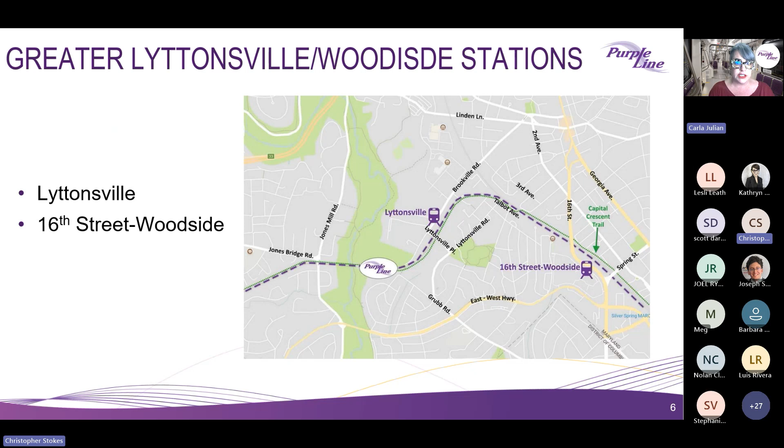And with that, I will introduce Ray Biggs, who will turn on our spring progress video. Thank you, Carla, and thank you everyone again. Welcome tonight. We are glad that you are joining us this evening for the CAP meeting.

We want to talk a bit about the momentum in 2024 on the Purple Line, which has now evolved into the transformation you just saw in the photos shown before the meeting started. Hopefully you saw the pictures going back and forth and can really see the Purple Line taking shape. Tonight you will see our 2025 Spring Progress video, including footage highlighting some of the transformational progress across the 16-mile Purple Line alignment. So without further ado, Chris, let's play the video.

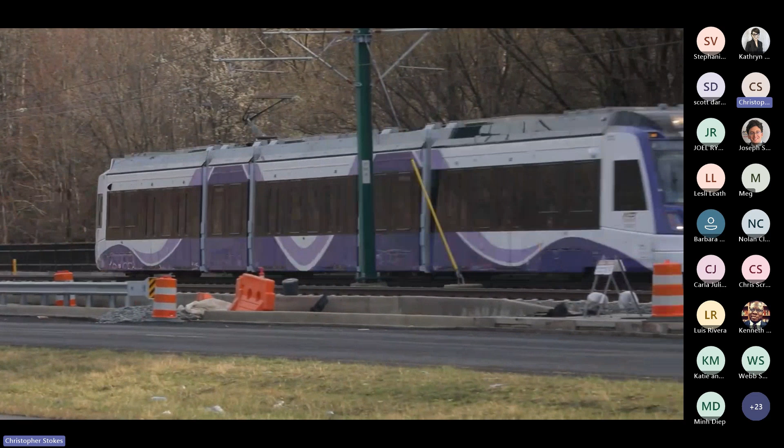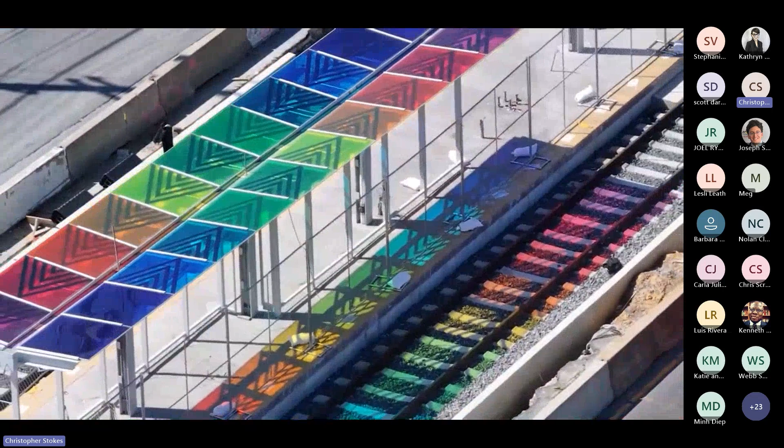Overall, the project is more than 76% complete. Now let's take a look at some of the transformations across the alignment over the past year.

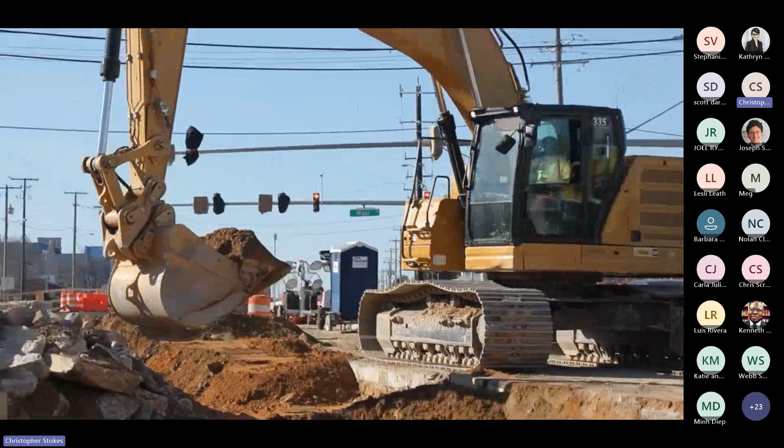In Bethesda, we have gone from a rocky shaft to a concrete cavern, which will one day soon allow commuters easy access to the Metro's Red Line.

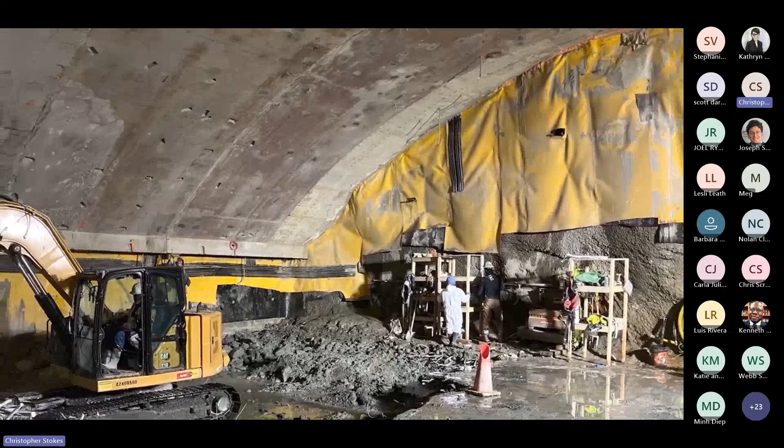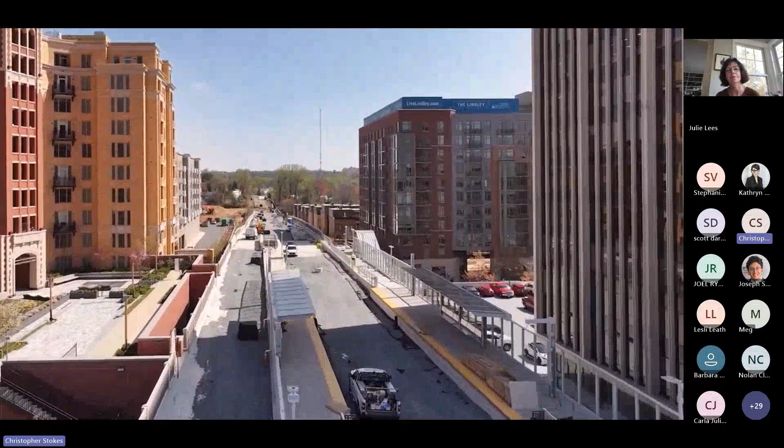In Chevy Chase, the Connecticut Avenue station is awash with color as the station continues to progress and have a transformative effect on the community around it.

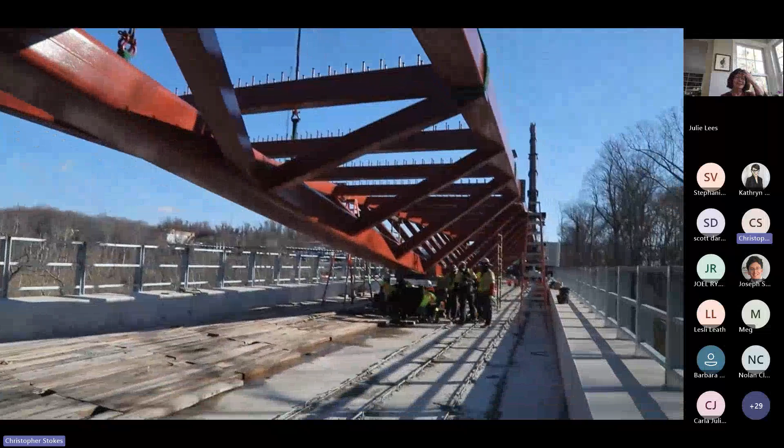Over Rock Creek Park, there is a new Capital Crescent Trail Bridge. This unique inverted truss bridge will be an iconic part of connecting the communities and the Rock Creek Trail system.

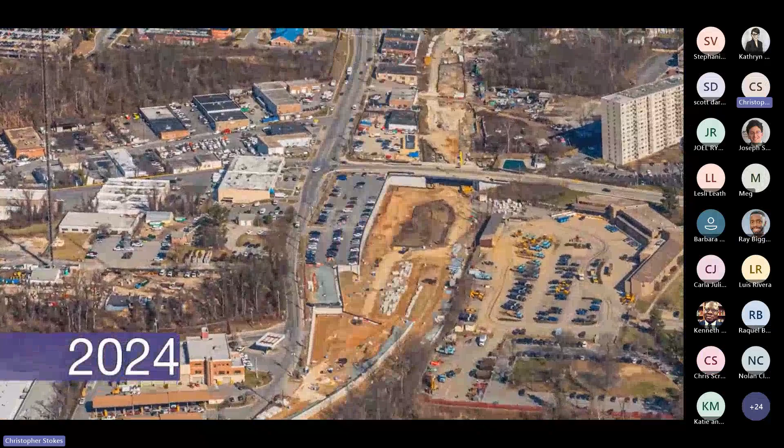The Lyttonsville Operations and Maintenance Facility and the Lyttonsville Station buildings can now be seen. The next transformation will be the installation of the many tracks in the yard.

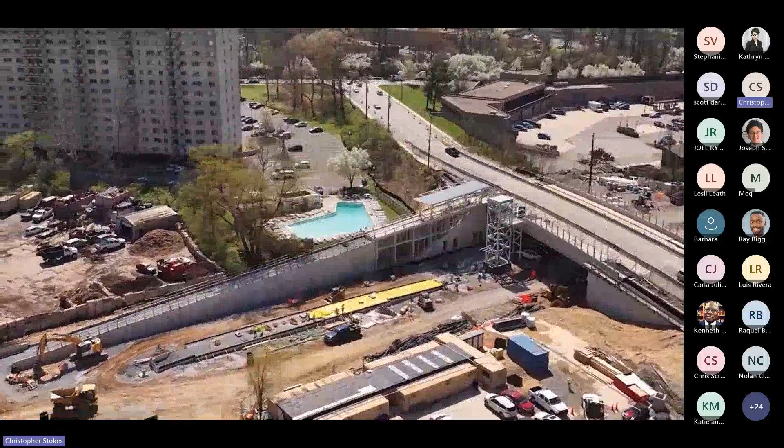Over in Silver Spring, the 16th Street station is now under construction. This makes all 21 stations now under construction.

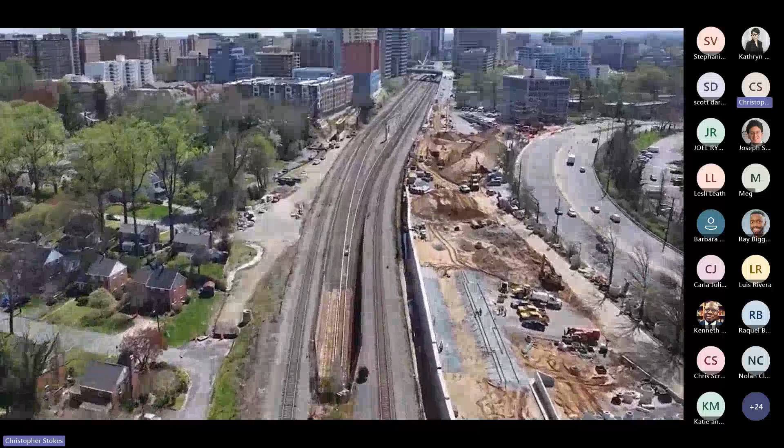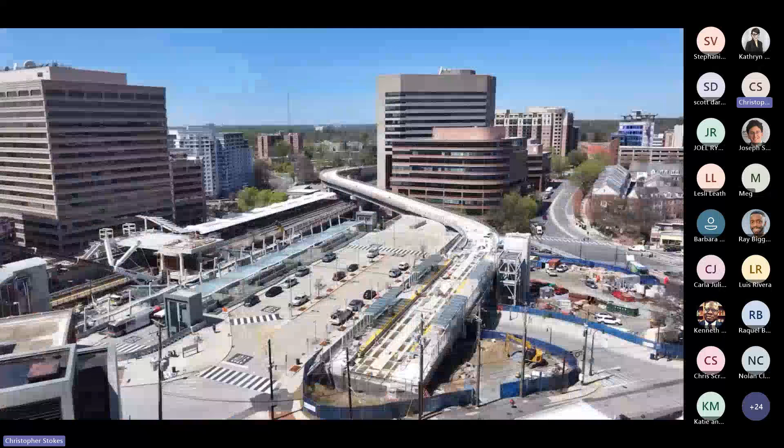The Silver Spring Transit Center is being transformed into an even more important connection point as crews construct stairs and elevator connections to the nearly complete Purple Line station. Crews have also completed the challenging structural work for the new mezzanine over the Metro and CSX tracks.

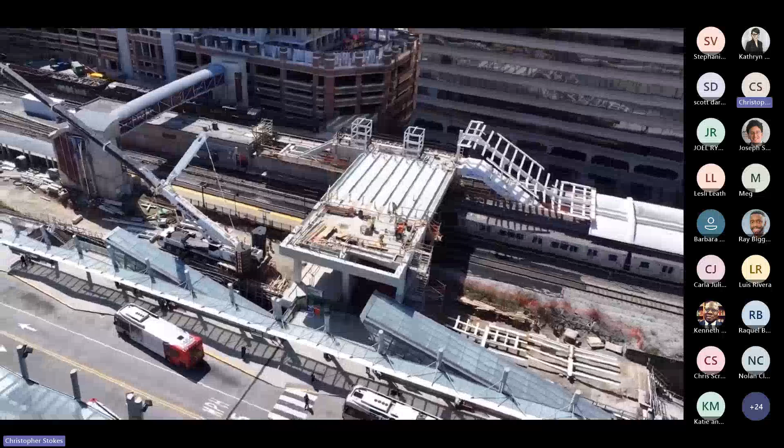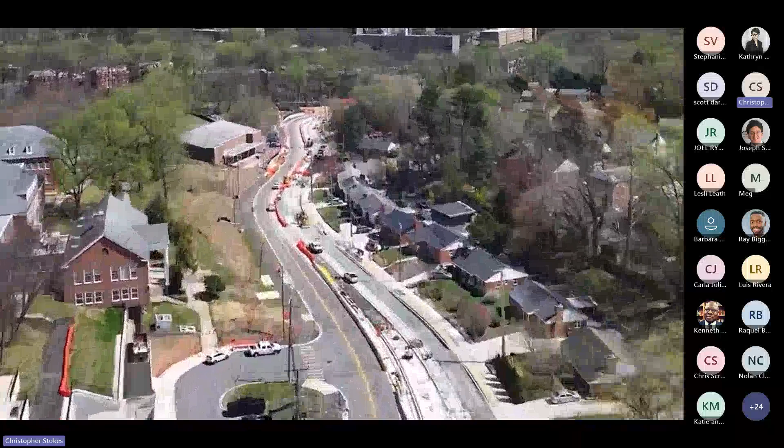Just outside of downtown Silver Spring, Wayne Avenue has more tracks, sidewalks, and curbs. Traffic has been moved onto the newly completed half of the Sligo Creek Bridge, and trail access has been improved.

Piney Branch Road has been totally transformed, with tracks embedded in the roadway and curbs and sidewalks along the entire length.

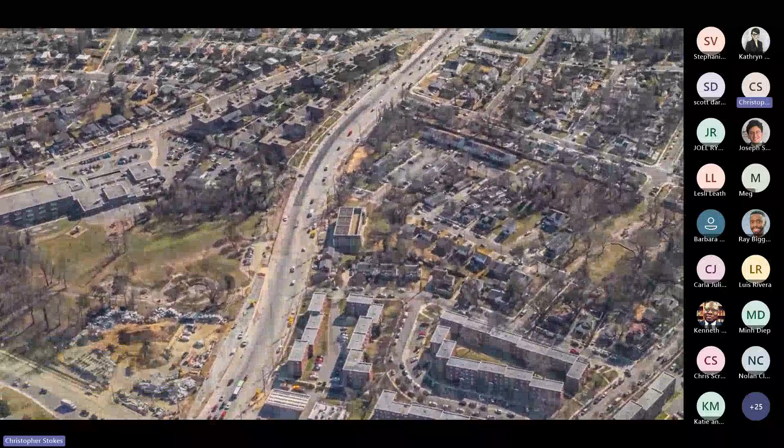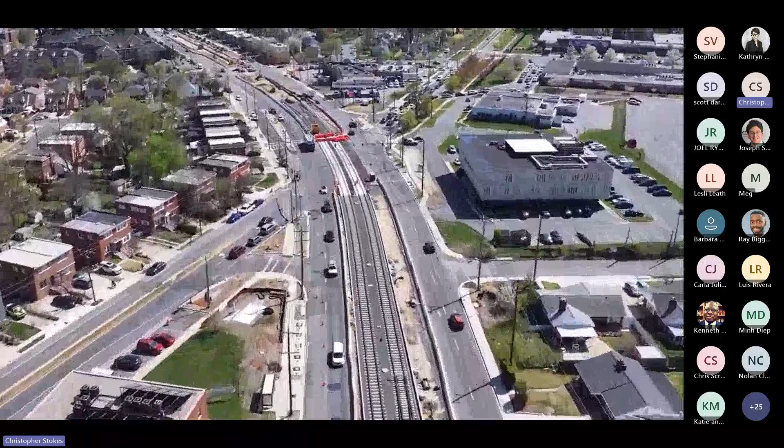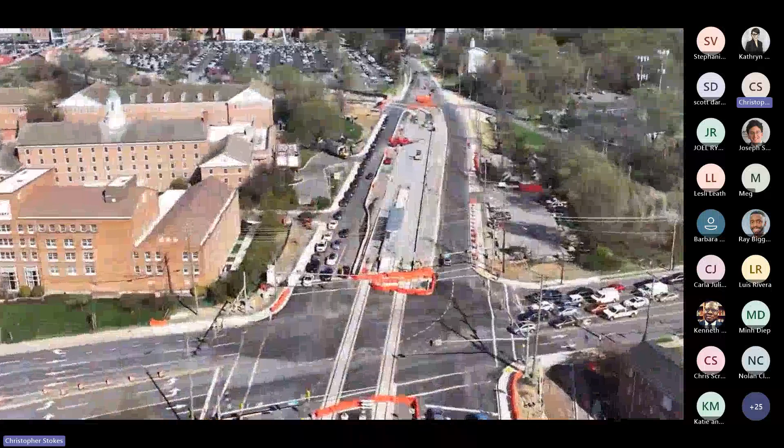University Boulevard has seen a tremendous transformation as crews complete over 95% of the curbs and sidewalks and have installed miles of tracks, including completing the most challenging crossings at Carroll Avenue, Riggs Road, and New Hampshire Avenue. At the UMD campus, tracks are installed across Adelphi Road, and most of the campus has catenary poles installed.

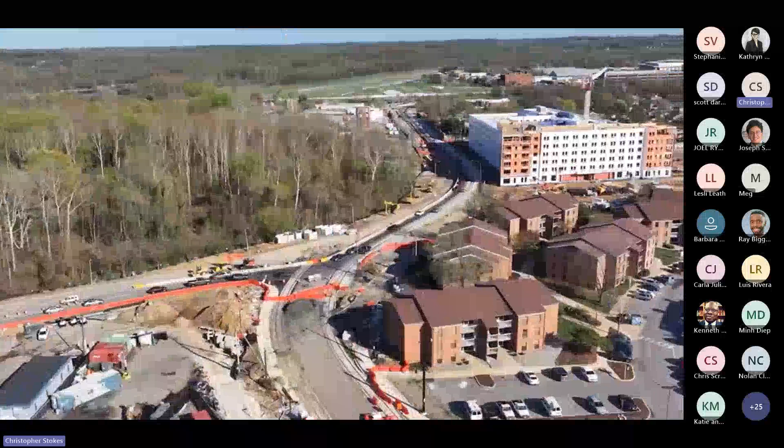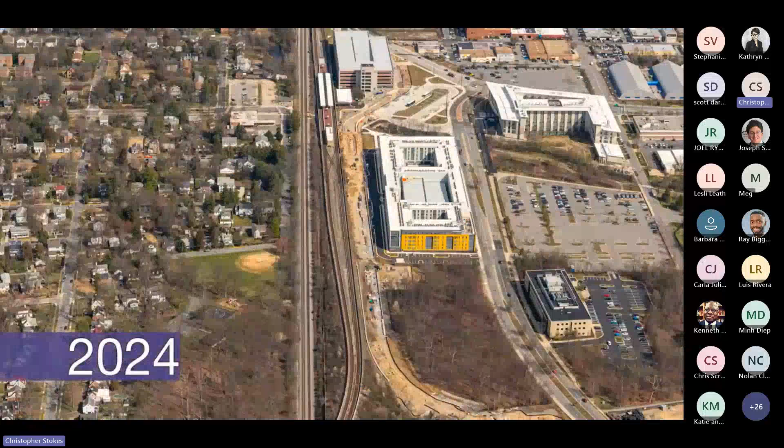The campus now prepares for system integration. Campus Drive, to the west of campus, now has the first pair of tracks installed, and drivers have been shifted to allow the final phases of restoration. Along River Road, stations, tracks, and even fencing have been installed.

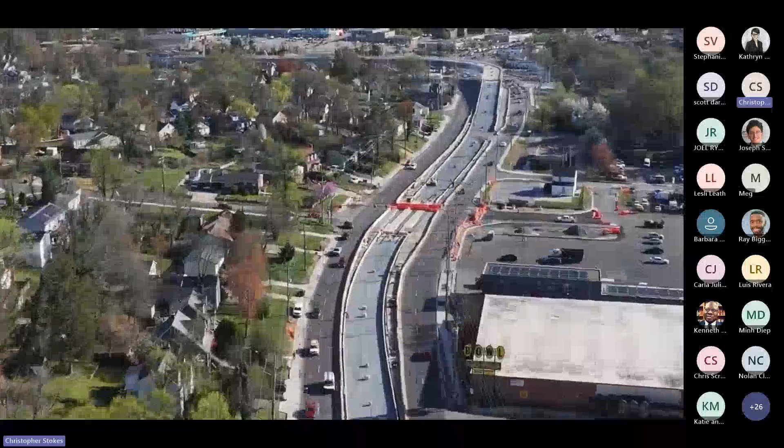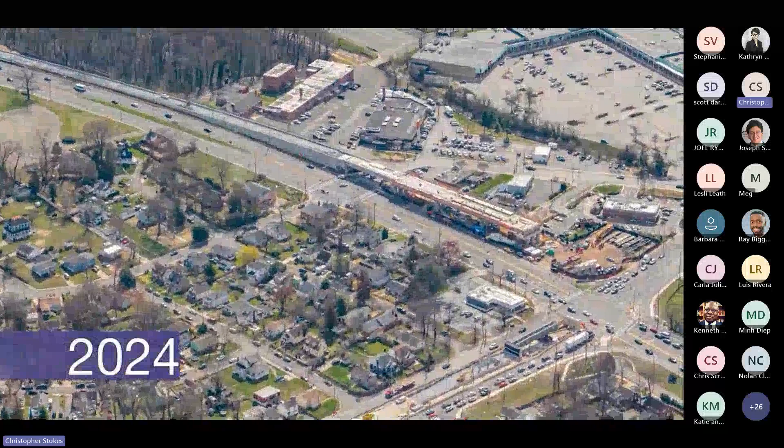Kenilworth Avenue has also seen a major transformation as curbs, sidewalks, and driveways have been completed, allowing the track work to commence in the middle of the roadway. The flyover at Kenilworth Avenue and East-West Highway and the elevated station continue to impress. The access stairs and elevators are underway, and the station's clear windscreens are ready for riders.

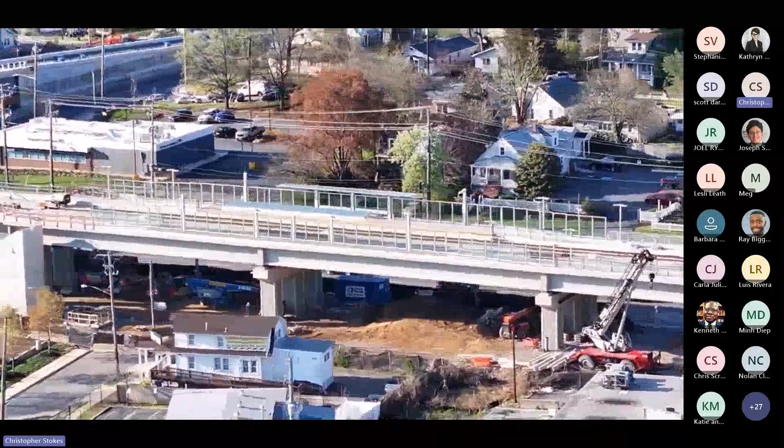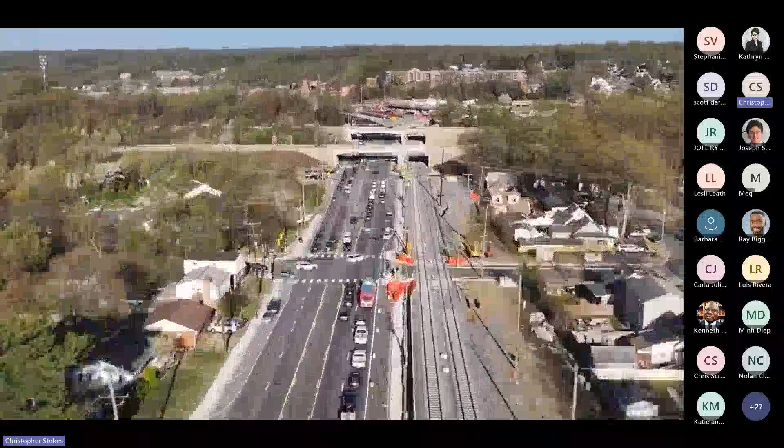Along Riverdale Road, new street connections, ballast, and tracks can be seen making tremendous progress. Specialty crews have completed the beautiful stonework on the Baltimore-Washington Parkway bridges, and the Beacon Heights station is largely complete.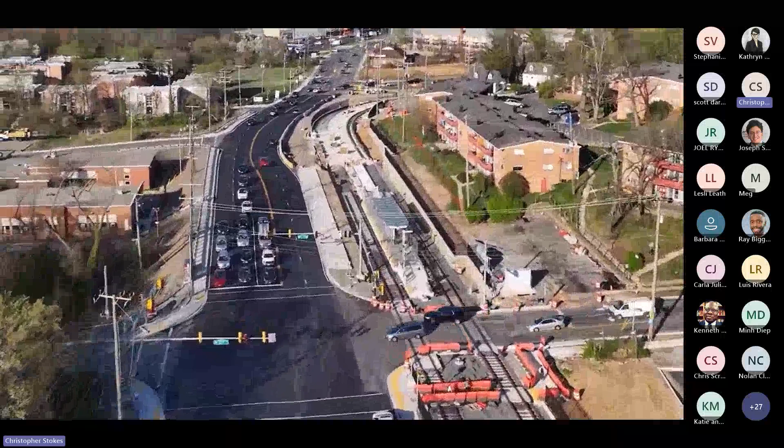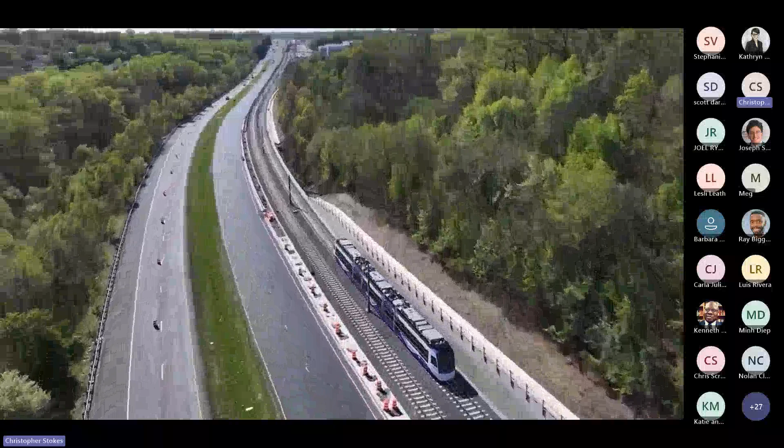In case you didn't hear, we have started dynamic testing of our LRV light rails. Along Veterans Highway, the new test track is powered up. An amazing milestone, as this area has been transformed into an active train line where the new light rail vehicles can be tested, operators can be trained, and the complex operation systems can be vetted.

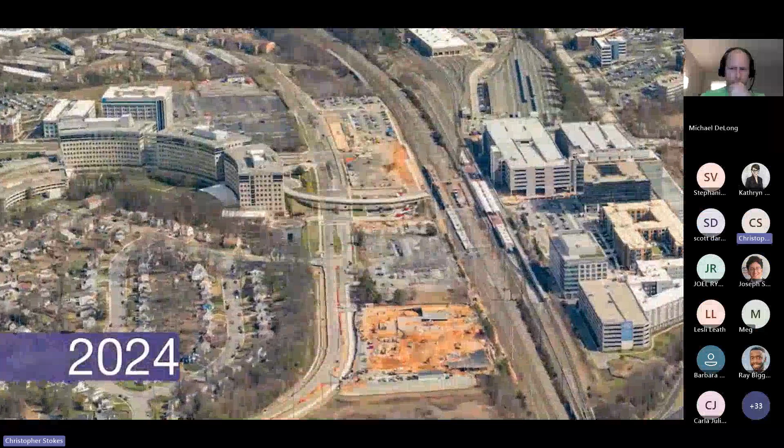Tracks continue all the way to New Carrollton, as the east end of the alignment builds new connections to this important transportation hub. Connecting metro stations and the communities across the alignment is one of the Purple Line's main goals. Soon you will see the state-of-the-art systems being installed across both counties, carrying the operational and communication systems for the LRV. Stay tuned for a lot more transformations coming very soon.

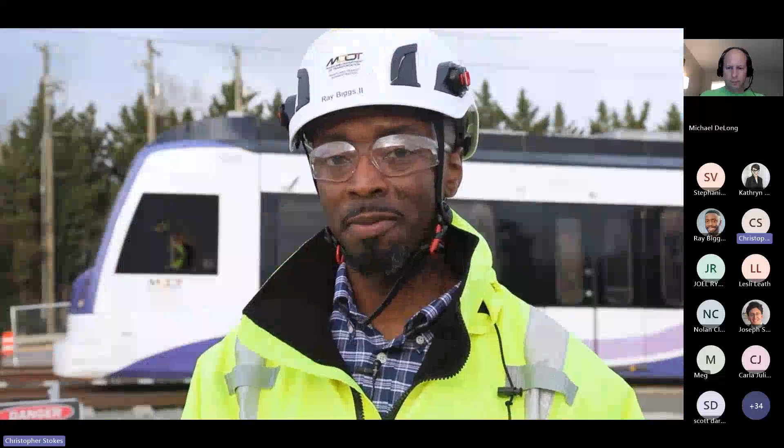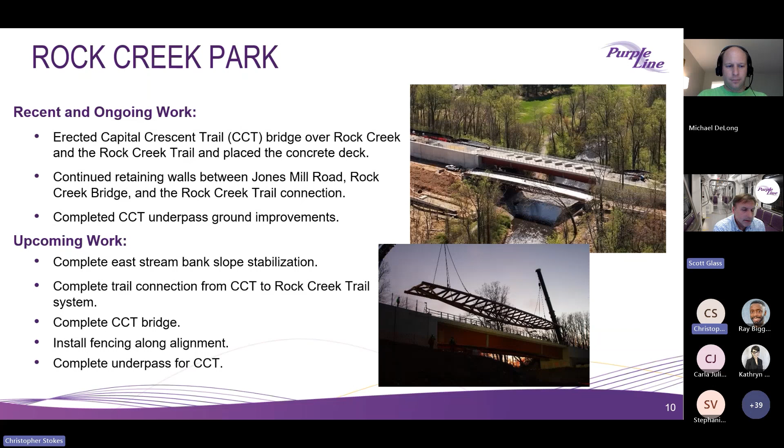Right now we have the deck placed. We'll be finishing the hand railing and the approaches. We'll be installing fencing along the entire alignment through this corridor, and then complete the underpass just to the east of this Rock Creek crossing. Next slide, please.

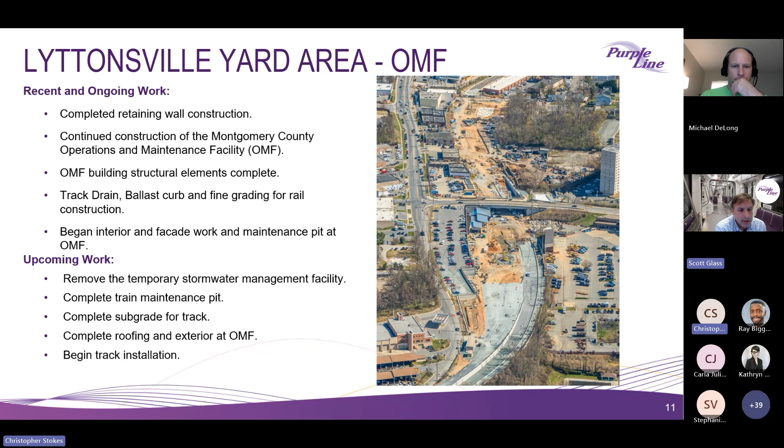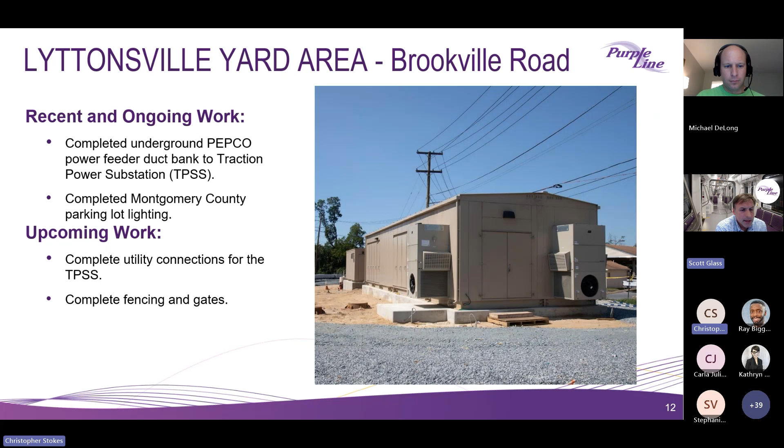In this same area along Brookville Road, we've been performing, over the last 6 months, a Pepco power feeder up the roadway to this traction power substation shown in the photo here. We've completed the Montgomery County parking lot lighting, and we're just about getting ready to pave that parking lot expansion. Upcoming, we'll complete utility connections for this TPSS, and we'll be finalizing those and powering this up. There's also a lot of fencing in progress now that we'll be completing with permanent gates in this area as well.

Just to the east of the Lyttonsville Bridge is our Lyttonsville Station. Our work over the last 6 months has been a lot of effort to complete the CCT trail ramp connection. We've continued construction of the elevator tower and the main access stair, and completed all of the underground work for the platform itself, including utilities, and we've completed the platform foundations, walls, and the platform itself.

The upcoming work at this station will involve completing the ramp for the CCT connection and these retaining walls, and the fencing that goes on top of those, beginning installation of the elevator and the exterior storefront that goes on this building facade. We'll be installing the station canopy and the canopy glazing. There's actually a lot of other glazing that'll be installed this month on the access ramp area.

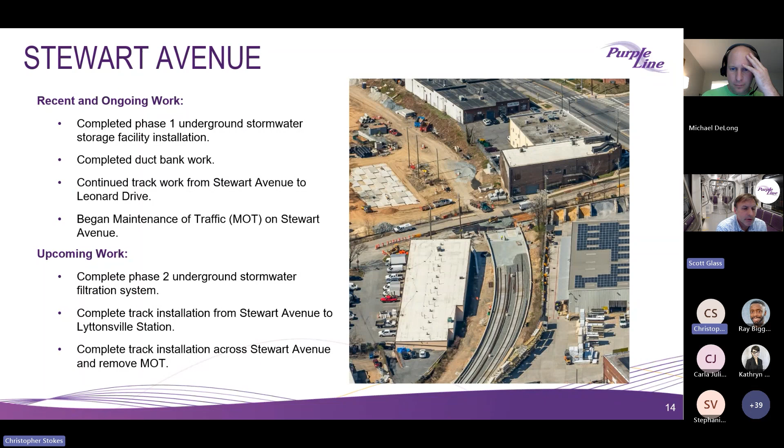So upcoming, over the next few months, we'll be completing phase 2 of this underground stormwater device, which is between the road, Stewart Avenue, and the portion that's been installed right now in the picture. We'll be completing the track crossing across Stewart Avenue all the way up to Lyttonsville Station, and we'll complete the track installation across Stewart Avenue and remove the temporary lane closures at this point.

Next slide. You see in this drawing right now, we're in phase 2 of this lane closure on Stewart Avenue. From February to June, we'll be in this stage. We'll be detouring, pushing traffic to the east side of this roadway, and that will enable us to construct the new roadway embankment and track crossing and the track run all the way up to the Lyttonsville Station on the west side of that roadway.

Occasionally, daily lane closures with flagging will be required for a limited scope of work, so there might be some occasional flagging work in this area too, but for the most part it will be two-way traffic.

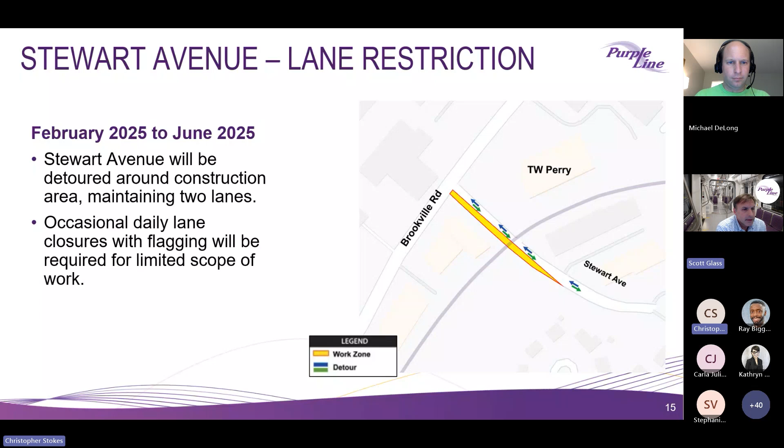Next. We've also been doing a lot to progress the work on the Capital Crescent Trail. Recently, we've done the clearing and grubbing and site preparations between Grace Church Road and 16th Street. Upcoming along that corridor, we have a lot of lighting, underground lighting conduit in progress and underway, and we'll be continuing a lot of retaining wall construction between Grace Church Road and 16th Street over the next several months, and really start to see that trail develop on that side of the alignment.

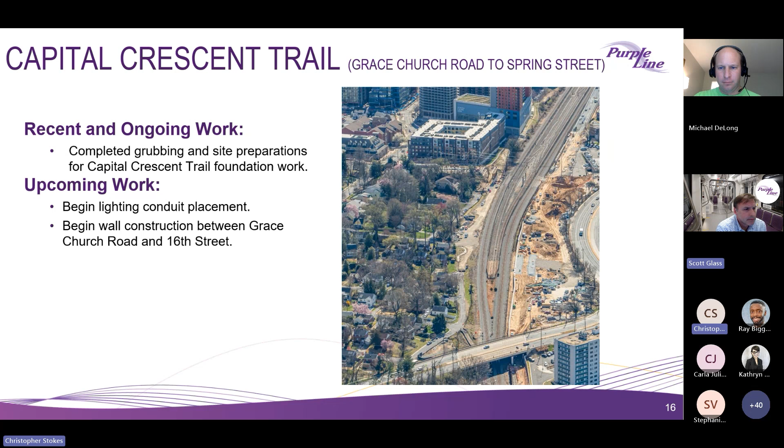At the Talbot Avenue to Spring Street corridor, we've continued wall construction under the 16th Street abutment. We're nearly complete with that on the south side of that bridge. We've continued a significant support of excavation operation for crash wall installation between the Purple Line tracks and the CSX tracks. We've started construction of the 16th Street Woodside Station, just to the east of 16th Street, in the very top of this picture with the light gray lines. Upcoming work will be completing the support of excavation for this crash wall.

SOE stands for support of excavation. We'll be completing that in this area along this corridor between the Purple Line tracks and the CSX tracks.

We'll begin to complete the remaining drainage installation for the Capital Crescent Trail on the north side of the CSX tracks. We have a significant under-rail crossing as a jack and bore operation to push through a 72-inch diameter storm drain crossing underneath the CSX and WMATA tracks that will be starting within the month. And we'll continue the construction of the Woodside station to its completion.

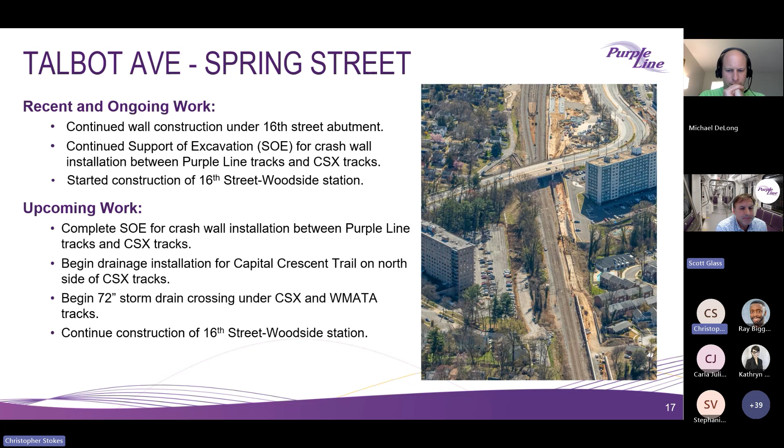At the Spring Street Bridge, towards the east limit of this work zone, we have completed temporary utility relocations that were aerial. We've completed south abutment demolition and excavation. We've completed north pier foundations and substructure. We're continuing relocation of existing storm drain under Pier 1, on the south side of the bridge. We've also completed the north pier itself, the structure of the pier.

Upcoming work in this area will include completing the north abutment demolition and driven pile foundations, completing underground storm drain relocations and new alignments, completing the Pier 1 construction on the south side of the bridge, and erecting the structural steel over the railroad tracks this summer.

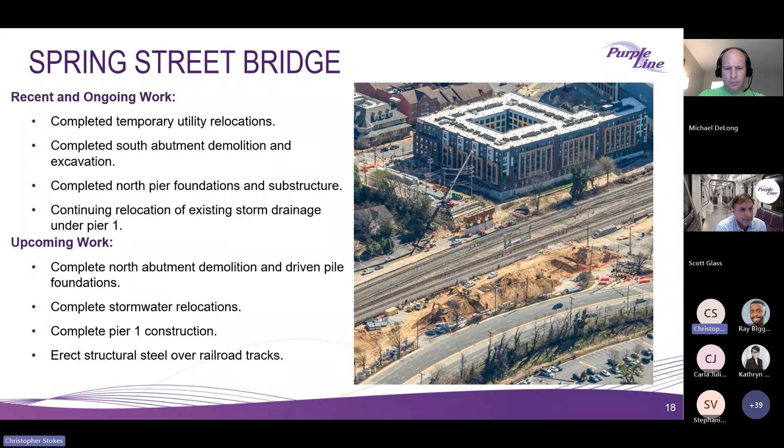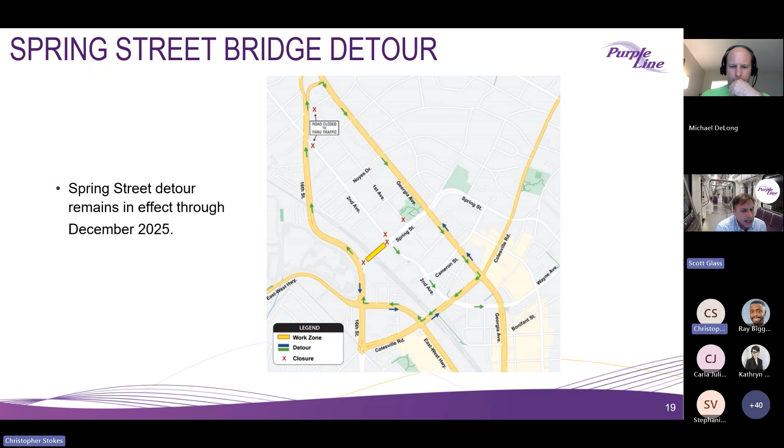Through December of this year, we'll have a Spring Street detour that will remain the same as the detour that's been in place, that runs our traffic up 16th Street and around on Georgia Avenue, and then across Georgia Avenue down to Colesville Road as well.

And with that, I'll hand it over to John Undeland, who's going to walk through our systems and testing.

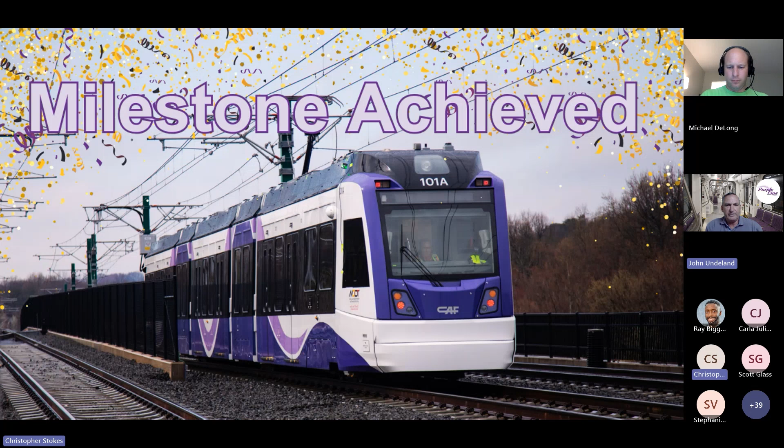Thank you, Scott. Well, as the ticker tape on the slide indicates, and as alluded to by Ray earlier, we recently achieved a very exciting and significant milestone for the project. Purple Line light rail vehicles, LRVs for short, are now moving on a test track powered by an overhead catenary system. We call this dynamic testing of the LRVs. But a video can tell the story a whole lot better than I can, so let's check that out.

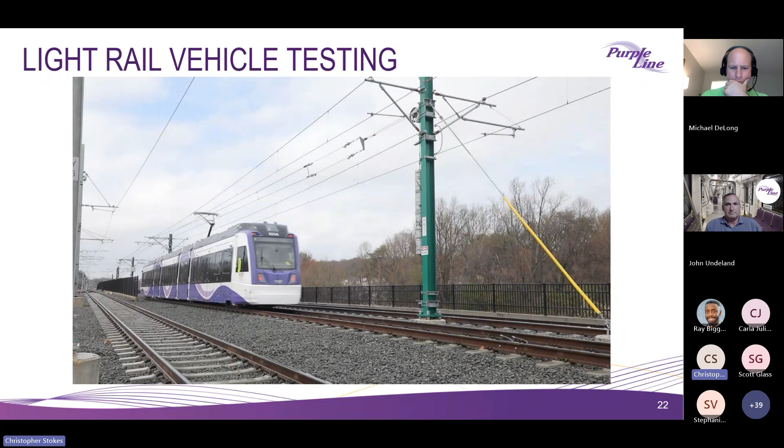So what can you expect during testing? We previewed during the last round of CATs that we'd be doing this testing. We recently just started doing the in-motion testing of the LRVs, and I'm excited to share a few details. Currently, we're not crossing any public roads or sidewalks, as we're running the test runs along an enclosed 1-mile stretch of track adjacent to Veterans Parkway and our operations and maintenance facility, which is not far from the Purple Line's eastern terminus at New Carrollton in Prince George's County.

Our test track is fenced, and we've taken appropriate safety precautions, including posting a large number of no trespassing and other safety signs. But as a reminder, please do not go anywhere near the moving trains, and be aware that the overhead power lines are now live and carry quite a lot of electricity. We want to make sure we're educating the public on LRV safety as we get nearer to expanding our testing and ultimately to operating trains with passengers on board, hopefully including all of you in late 2027.

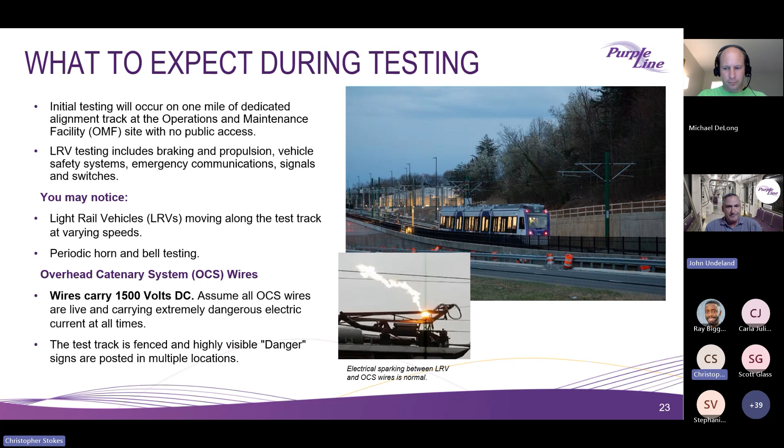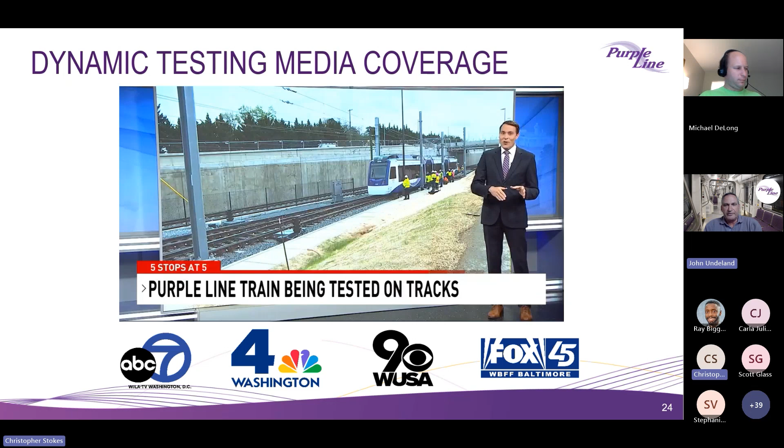And of course, this major milestone made a splash in the news, so you may have seen it there first. A lot of coverage. With that, I'm going to turn it back to Carla to give some more information about outreach in the community.

Thanks, John. As you guys know, we attend a lot of community events, and we're always open. If you guys want us to attend any that you're doing, just let us know.

Here's some photos from recent 2025 events. We were at Maryland Day. We did Sweep the Creek, hosted by Friends of Sligo Creek, and DC Transit Day. The team also presents to school PTSA meetings throughout the year.

As construction is progressing and we can finally see the light at the end of the tunnel almost, please let us know if we can come out and support you or attend anything, and we would be happy to do that. You can visit purplelinemd.com to see the full events, and email outreach@purplelinemd.com if you'd like for us to attend any events we don't already.

Again, with safety being our number one focus, we do have a safety campaign as the rails are being installed and people are on scooters and bikes, making their way around as pedestrians. Please, if you are using a bicycle, approach the tracks perpendicularly where you can. Don't ride parallel, as you might get caught in those tracks, and just be very cautious if it's raining and slippery.

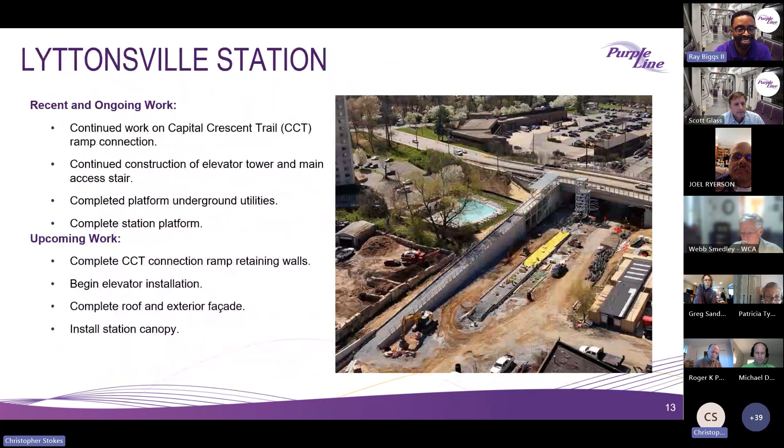Scott, if you want to weigh in on the specifics around the other questions - Spring Street Bridge and Jones Mill. Sure, the Spring Street Bridge is particularly challenged. It's got a lot of variables that have made that not go as planned. The first issue we encountered was a challenge with the aerial lines that were not relocated where they needed to be temporarily in time for our demolition activity, so we had to revise the demolition activities, which made demolition of that bridge go a lot slower. It's also a very challenged location because of the additional layers of review and scrutiny with the two railroads that occur with any change, whether it be the permanent design or the construction activities, so that has been very difficult to deal with.

That schedule on that bridge is going to be out of the ground very soon, within the next two months, given these unforeseen challenges that we're surprised about and that delay progress. But that bridge right now we expect to open by the end of the year.

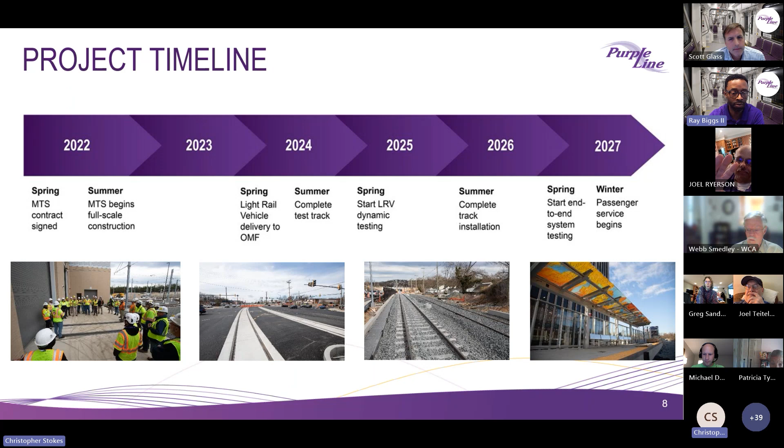As far as the vehicles, we have 28 vehicles. Currently we have 8 of them down at the operation and maintenance facility at Glen Ridge. You can see them moving in that video there. They will operate during peak hours at 7.5-minute headways, and off peak at 10 to 12 minutes.